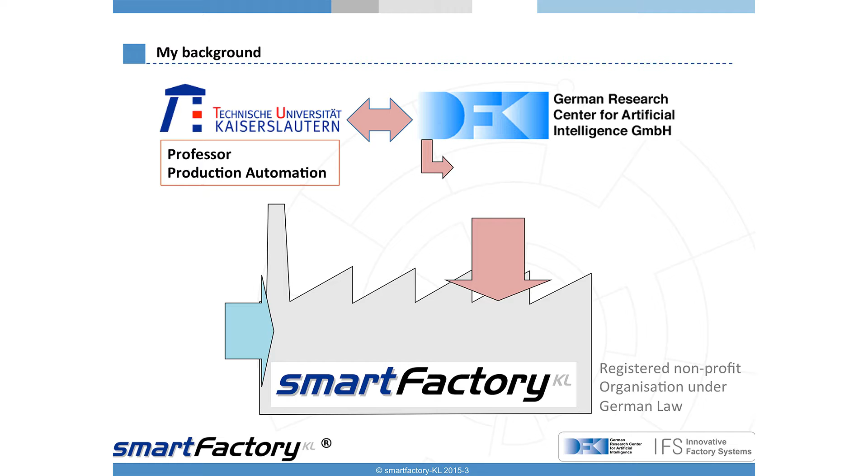I also have a professorship at the University of Kaiserslautern, and by this I have access to the knowledge of the university, the science base, in addition to the research center. And then we have this SmartFactory, which is an association, a legal association under German law, with a lot of companies being partners or members. There is an executive board, and I'm the chairman of this executive board, with co-chairmen from industry to make clear that this is an industry-academia-driven thing.

I think it's quite clear to everyone that we are already living in the internet for many years, so the Internet of People is a fact today. Everyone has these little smartphones, and you can be anywhere in the world, in an airport, wherever you are, switch it on, and you are just connected to the internet with access to everything around the world.

Since about 10, 12, 15 years, we are talking about the Internet of Things, and furthermore we are talking about the Internet of Services. I think especially the Internet of Services is the part of the internet where finally most of the money is made. The people offering things for the Internet of Things put a lot of effort in it, but the money is made by the services running on that - these are the Googles, the Facebooks, and so forth.

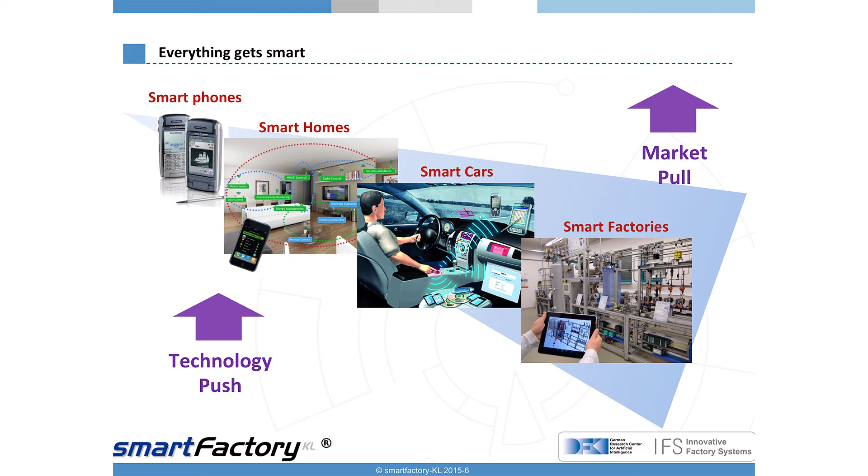Many years ago, there was already the first internet refrigerator, offered by Samsung - that was 2001, 2002, I guess. This internet refrigerator was not a success, at least not in Europe and many other areas of the world. It had the advantage of scanning all the goods going into and out of the refrigerator, so if the milk runs out, it can order milk. But if there's no business model behind it - somebody delivering this milk - the business model will not work. I think this was one of the major reasons the early smart home technologies were not really successful, because the business models were still missing.

So now we talk about the fourth industrial revolution, called by the buzzword Industry 4.0, which is a German buzzword. This is why the German government likes to write it as a German name, not with a Y at the end, but with IE, for example.

The first industrial revolution was around 1800, driven by advantages like the steam power engine, the first trains, and many things around this time. Mostly this revolution took place in Great Britain, which was the most industrialized country at that time.

The second revolution was around 1900 to 1930, perhaps. There were a lot of changes within this time - we had electrical power generation and distribution, but also mass production like the Ford Model T, built on a conveyor belt, bringing prices down and production up.

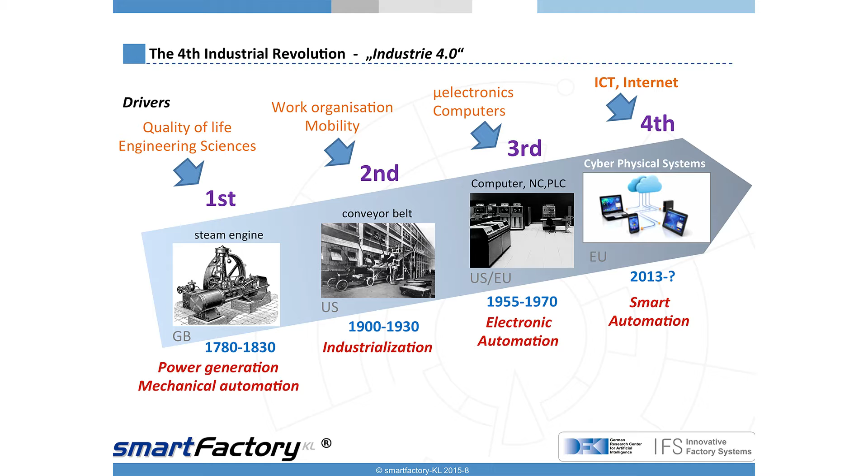And now we are looking into the future, and we assume there will be a fourth industrial revolution, driven by internet technologies, networking all the elements. This is called the smart automation era. But we are just assuming there will be a fourth industrial revolution. Let's wait another 20 years or so and then look back and say, is it really an industrial revolution? I think it is, and it will be, but we have to wait and see what happens there.

If we look back again, the first computers came up around the 50s, and you may call it perhaps the 2.5 revolution at that time. There was already the first computer installed in companies, mostly for things like accounting, for order tracking, and things like this. At that time, there was just one big computer in one company and nothing else.

Then the third industrial revolution, the electronic revolution, brought more and more computers into that. The PC was invented at that time, and the PC and all the other microprocessor-based systems allowed us to make new solutions. This was taking place mostly on the control level, the medium level of the companies. And now we are going down to the sensor and actor level.

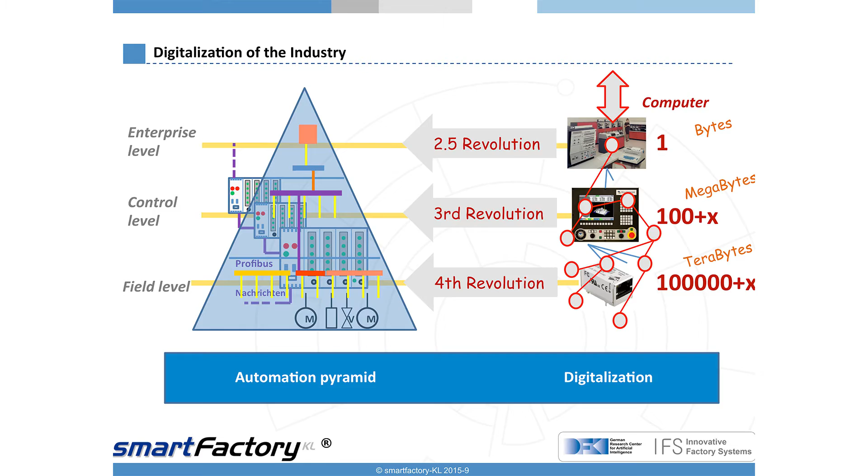So Industry 4.0 means linking all factory objects into a network based on internet technologies, the Internet of Things in the factory. In consequence, all objects like machines, products, but also the humans, the people working there, are smart elements in such a production system.

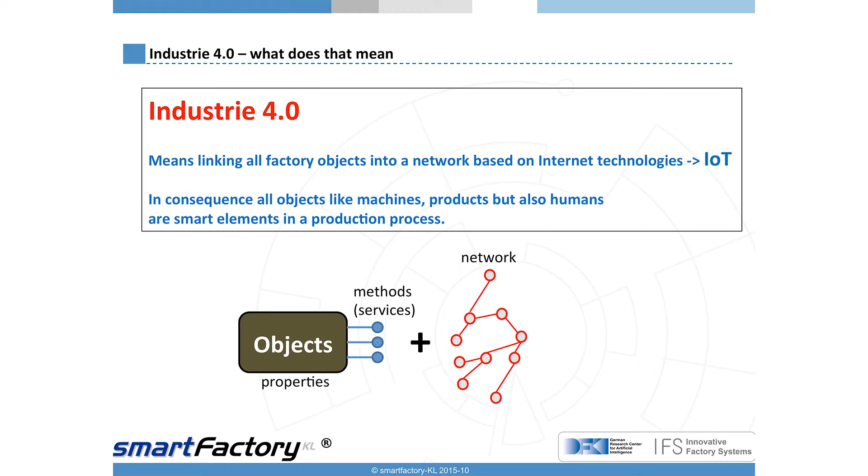So I talk about objects, I don't talk about a sensor or a worker specifically. In a more general sense, we can treat these elements as abstract objects with properties and methods, like in computer engineering. And we have this network, so we can connect these abstract objects via a network, set up networks of these objects, and they can communicate. This is the real progress we have there.

So this will change our factory world in the sense that this very static 3.0 era will be replaced by a very, very dynamic thing, the Industry 4.0 era. We will have more communication of all these objects. The products will also communicate.

They have RFID chips on the products. The people working there will be a part of the network and can communicate. We will have remote services, as we have already in many companies for many years. We will have access to all this data being available via cloud systems, the cloud approach.

For sure, we will extend our systems dynamically, so they are not pre-planned 100%. Just bring a new module in, just plug it in like your printer at home, and it will run and extend your system. We will have the app world also in the factories.

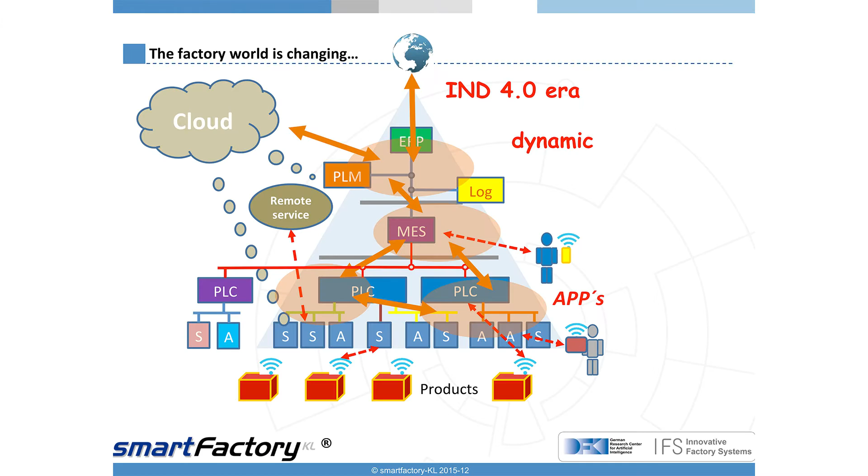The first app stores from companies are available already today, and this will now be extended very, very rapidly so that we can use apps for extending or for bringing in new functions to our technical systems, but also to the people working there. So all this will be connected in a network, and we lose actually this pyramid-style hierarchical system.

We move into a more, let's say, for me, a little bit chaotic network system, which contains domains, or which we can name by domains, because every object can now talk to any other object via the network. So we don't have this hierarchy in that sense anymore, but we have the possibility of having an open network with a lot of objects communicating to each other.

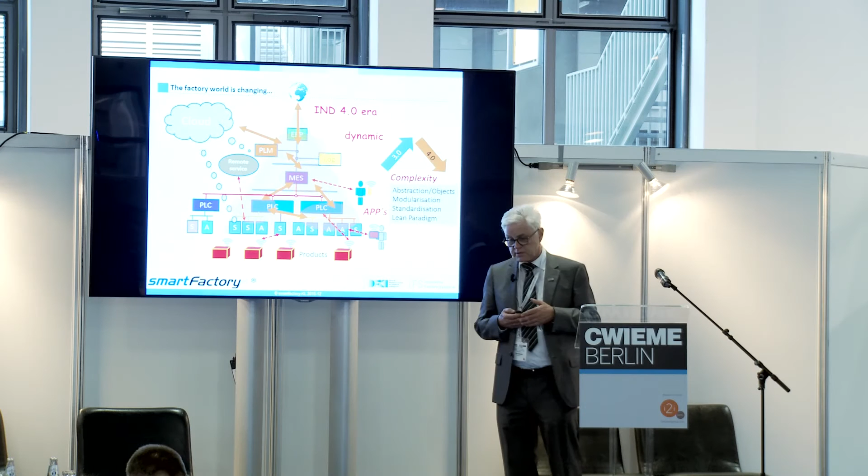This will hopefully bring complexity down because first of all we will have these abstract objects. Don't think about a specific sensor from this or that company, but on the first run just talk about an abstract object, a sensor which has a set of methods and properties, and you can deal with these objects for quite a long time in the engineering phase without having the exact hardware information behind. This decouples software engineering and control system engineering from hardware planning, and we can parallelize these things, making it much faster than it's done today.

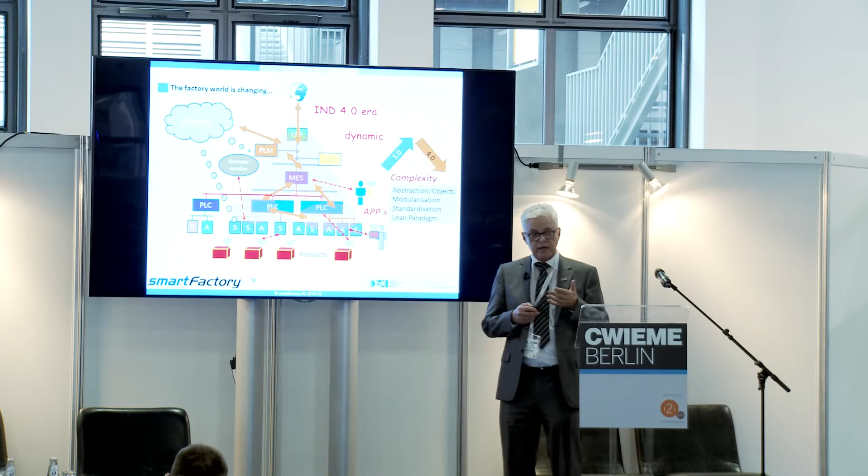We will have a stronger modularization. We will use more standards in this new world, so we have to rely on standards on all levels. And we will also integrate this wonderful lean paradigm, which we have had for more than 20 years already. So always think about the real value of your parts, and keep in mind whether these technologies will really help you or not, and then apply them.

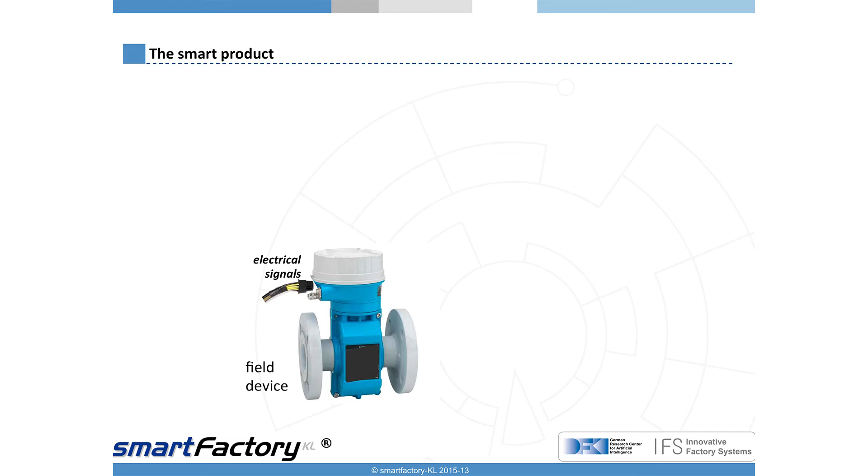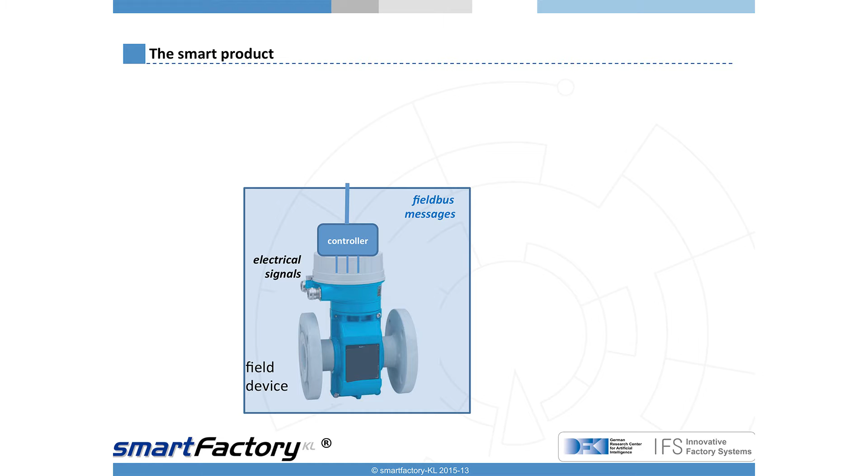Going a little deeper into this topic: first of all, this is a quite traditional sensor as you normally have it today, mostly with some cables coming out of it. This is already 20 years ago, these were 4 to 20 milliamperes, for example. Then over the last 20 years we replaced these analog cables with networks, the first networks. We added a little microcontroller onto that, so finally we had field bus messages, and this sensor was sending field bus messages into a factory-specific network at that time already.

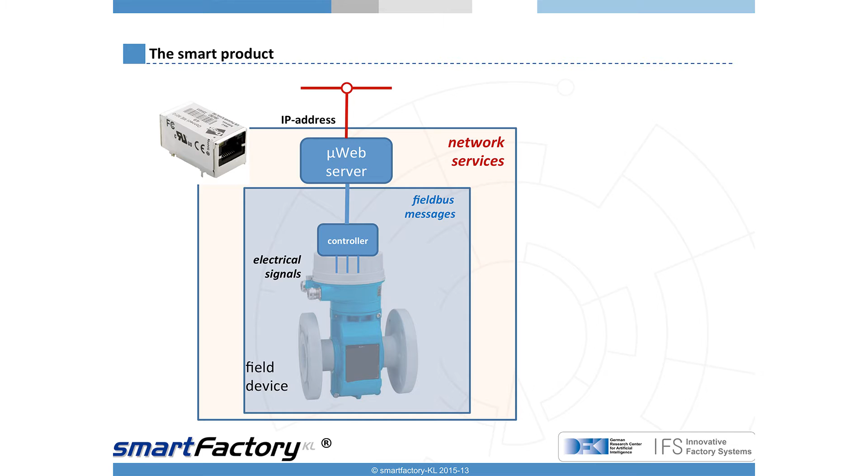And now we are coming to the next step. Now we are adding a micro web server to this sensor, for example, or whatever this may be, to any object. This gives us an IP address and IP technology, so this sensor will finally be part of the internet, and the communication will go a level higher, from messages to services. So we talk about service-oriented architectures on this level, and these elements will offer finally self-identification.

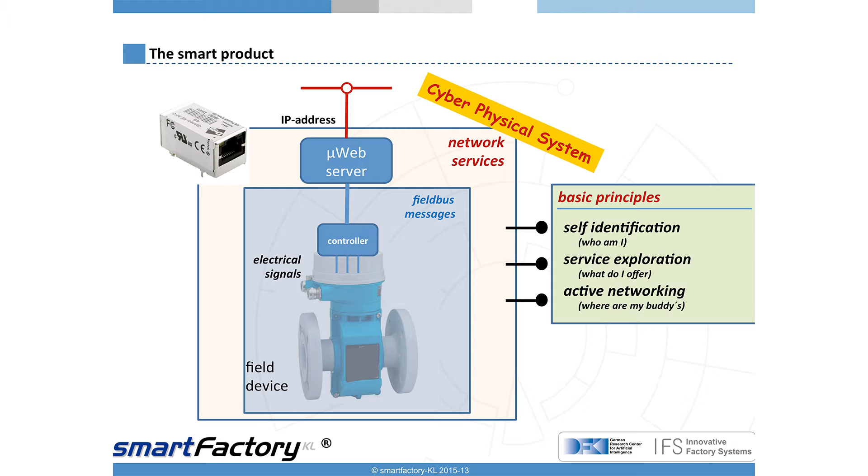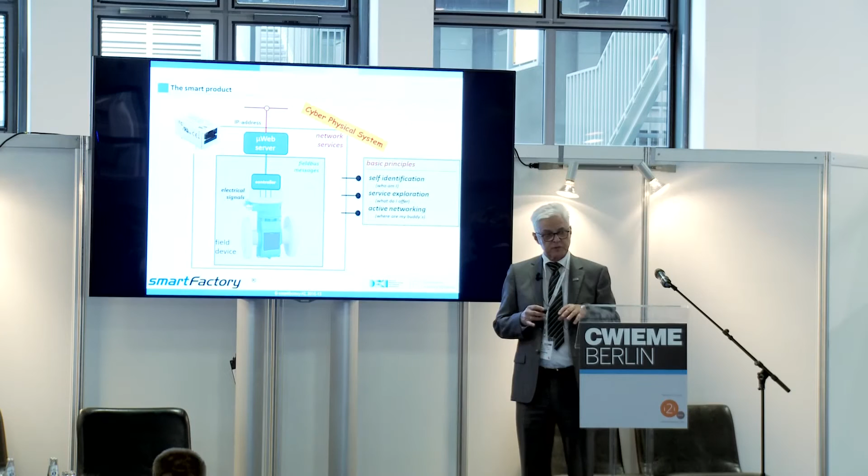First of all, this object may be quite unknown. Just plug it in, and it will tell the system, hey, I'm new, and I'm this and this object, for example, I'm a sensor from this manufacturer, like your printer at home when you plug it in for the first time into your computer. We have service exploration with these objects, so we can ask into the objects what services they offer into the network. And we have active networking capability, so that these objects will automatically configure in the network, and we don't have to care about all this configuration.

This world is available today already. What you see up here, for example, this little block, is a complete computer, a complete PC, the size of 3 pieces of cubic sugar. It costs 30 euros. There's now a new one announced which has just the size of 1 cubic centimeter, a complete PC with a Linux operating system on it. So the technology is available, it's cheap, it's available. If you buy one of these things and plug it or implant it into your sensors for little money, you automatically become part of the internet.

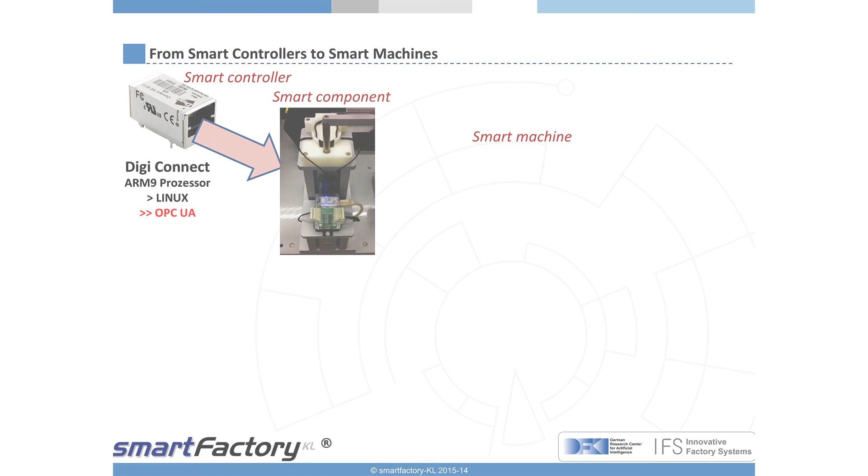So this is what we have done in our lab. This little block here is a bit of I/O and power supply, and the whole thing is now a pneumatic press, for example. Now this complete unit, the pneumatic press, is a cyber-physical system which can be linked into the internet. And actually, by this, I can sit in an airplane over the Atlantic Ocean, and as long as I have the IP address, I can operate this press if I want. If this makes sense is a different question, but I can.

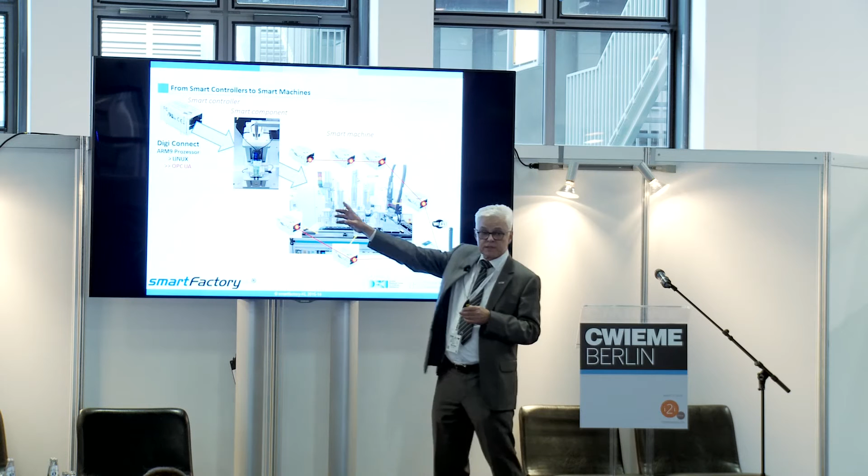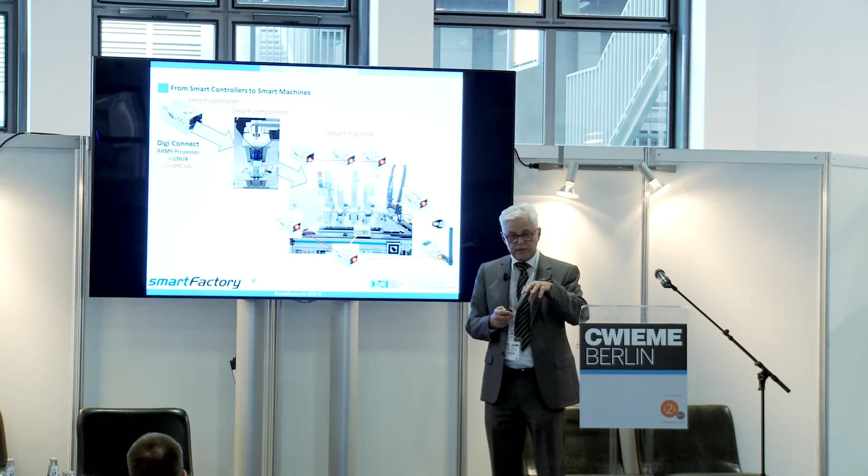So now we have built complete systems out of this. One of these cyber-physical systems, we made a complete assembly system out of it. You see all these little PCs running in the network, and each of these PCs is controlling one of the mechanical components, so the network of all these elements is doing the job. There is no PLC anymore, just a virtualized orchestration of everything, and everything is controlled by the production information which is stored on an RFID chip on the product. So the product can tell the system what to do.

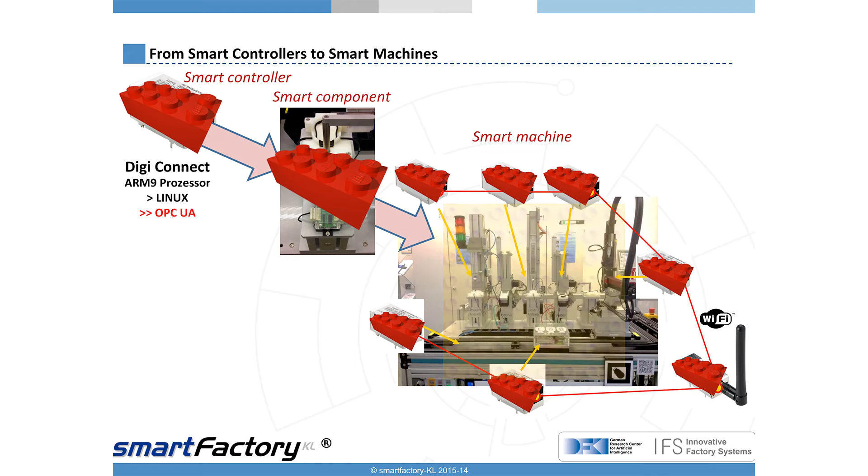We also can use these things wirelessly, so there's also a version available with an antenna on it. It's 6 or 7 euros more, and then you have a Wi-Fi connection if you want.

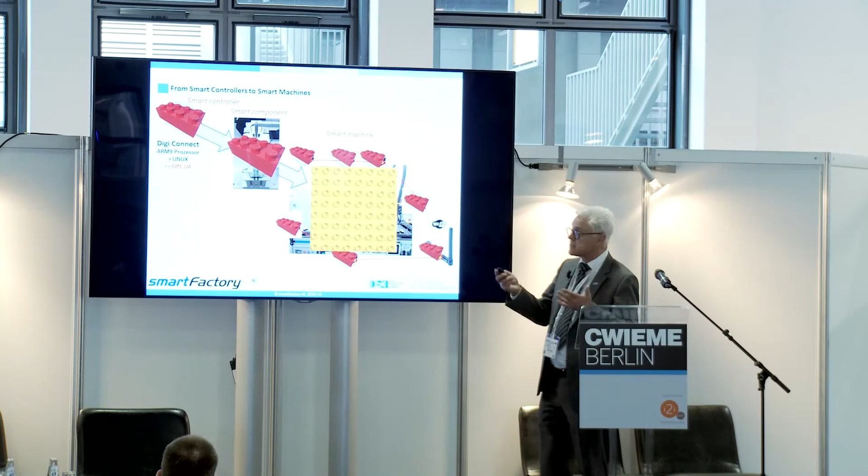Now, if you have these standards, it may be a good comparison to compare it to Lego bricks, because what we have right now are standardized building blocks which we can put together as easy as playing with Lego bricks, and also rearrange the systems if we want, because it's quite easy to link these systems together, and they will also organize by itself. So this is a picture as a comparison.

As I said, this will work only when we have standards. So we made our standards in our group of companies. We start with what we call, as a joke, our USB connector, but it's bigger than a USB connector, nearly the same, because we have one standardized connector, and in this connector there is a power supply, 3 times 400 volts, 24 volts, emergency stop circuit, pressurized air, plus network. The network is also just all in one connector.

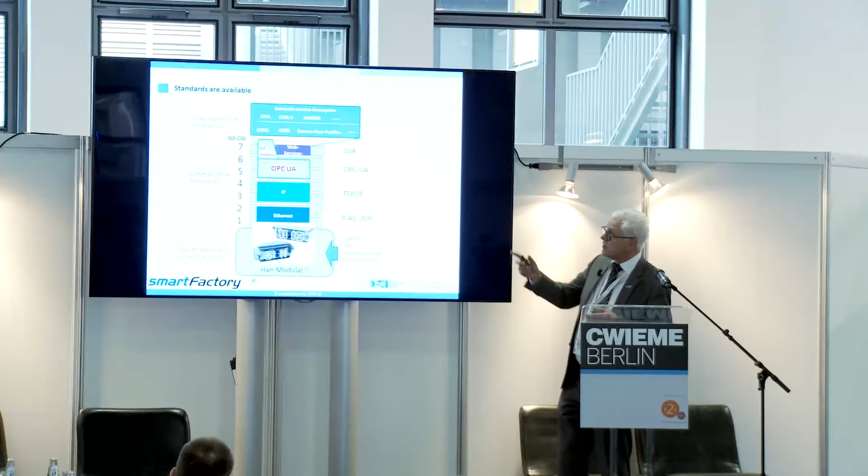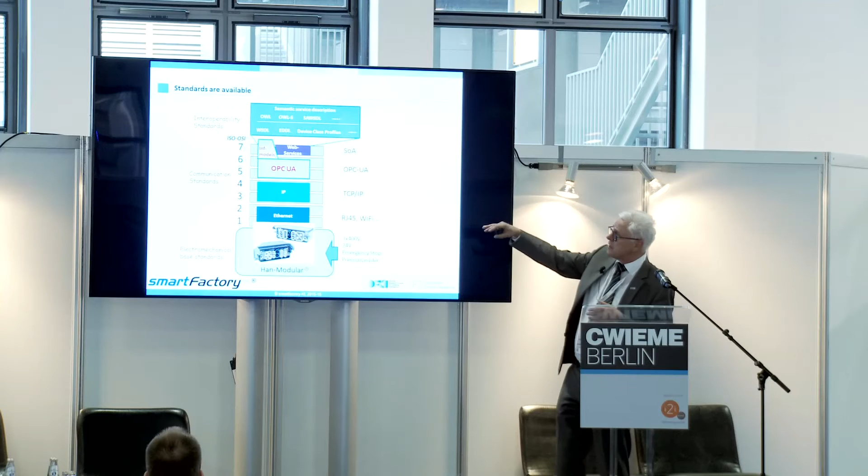Then we have the communication stack above. For communication we have TCP/IP, the standard internet protocols. On the upper levels, we use OPC-UA, I think, as the only worldwide accepted client-server technology for communicating in the factory. And then it becomes quite interesting, because above communication, we will have interoperability.

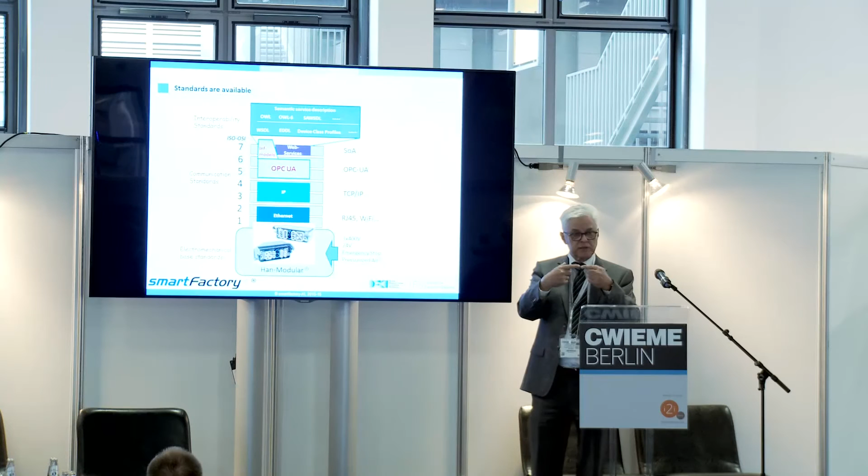So we need the interoperability of these devices. A completely unknown and new robot must be able to communicate for the first time with a machine tool being in the system. So how do we set up a communication between such unknown objects? This is interoperability, and this is the most crucial part of the job we have.

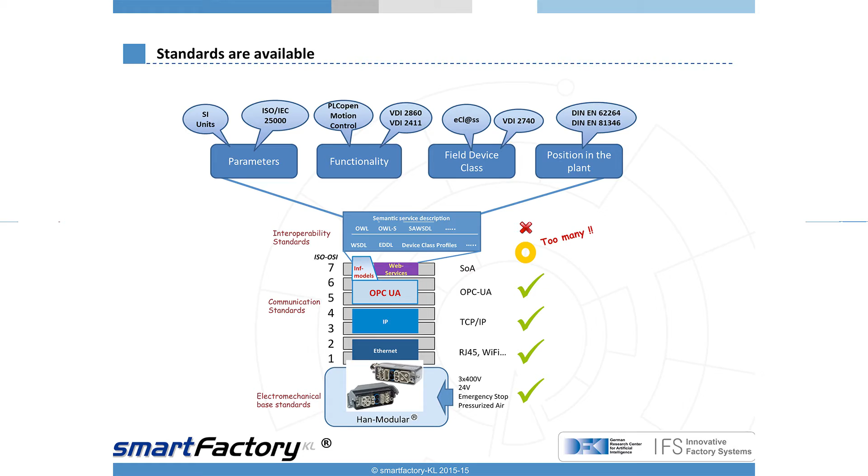There are already a lot of standards available, but we still have to work on some of these levels, especially on the upper levels of interoperability. There's still a lot of work to be done. We demonstrated at last month's Hanover Fair that this works already in our system, but we know exactly that it's not the right time to bring it into industry. So on these upper levels, we still have to do some jobs.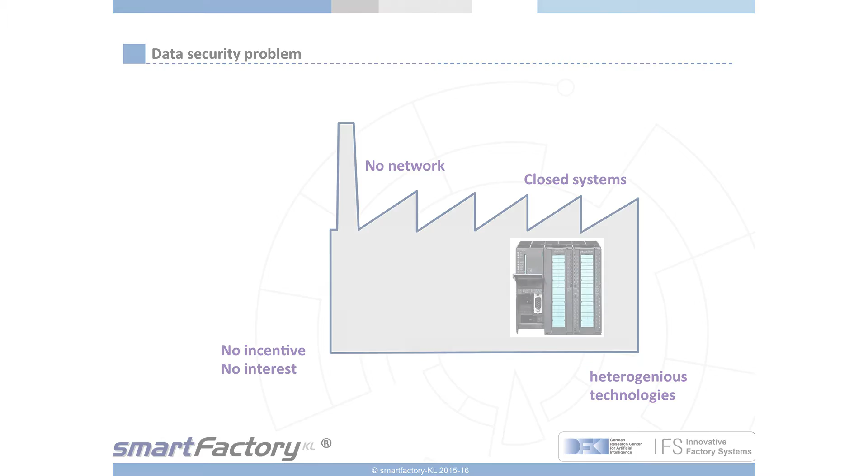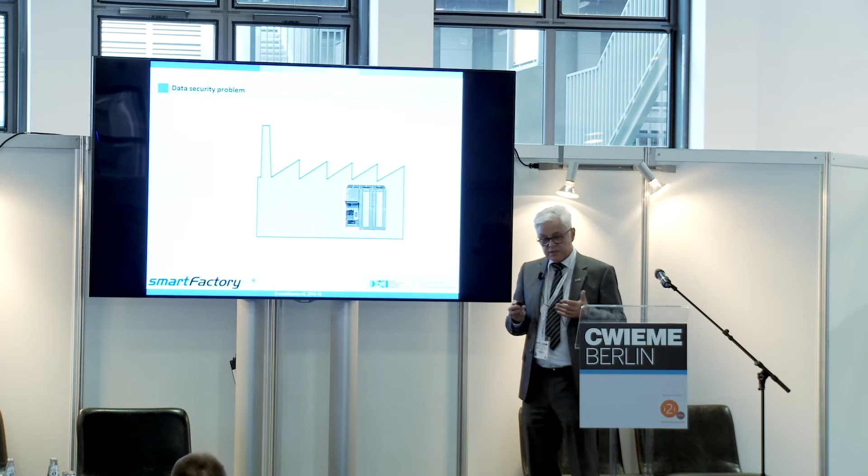Unfortunately, the internet has not only advantages. The internet is cheap, it's proven, it's mature, wonderful, but also anyone can access the internet, and anyone can do some harm to these systems, as we have just learned from this French event with hacking the TV5 station, for example. So the old world is really changing in the sense that we will have now these networks.

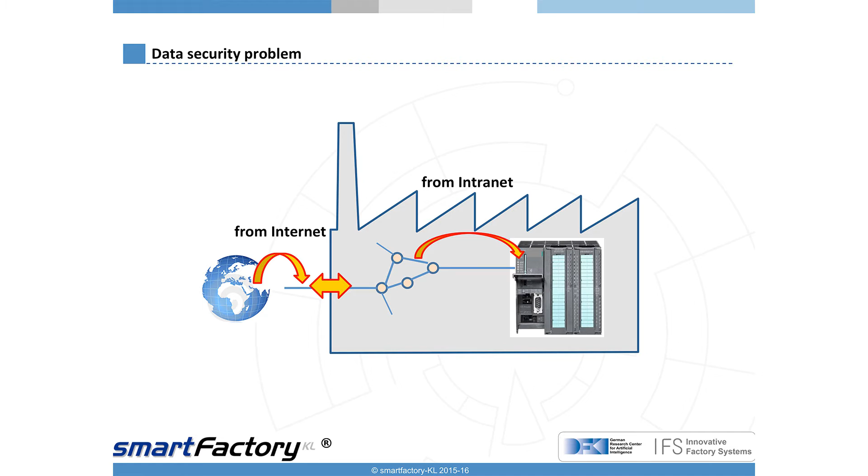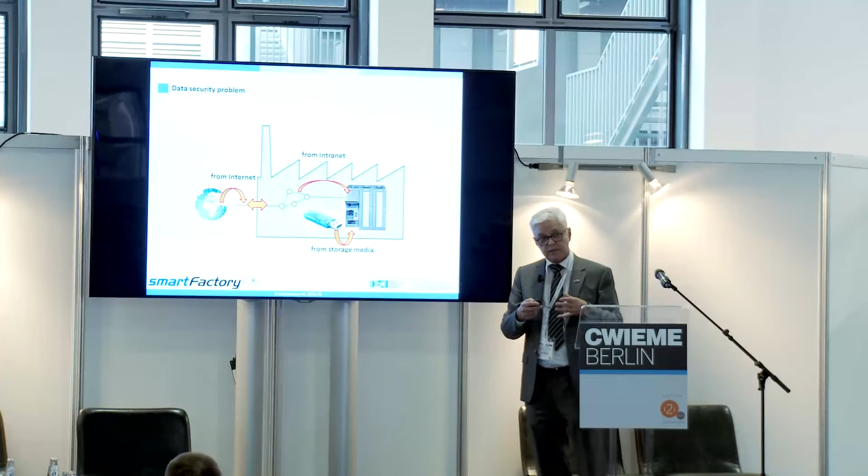We will have more and more access to the outer world, by the internet, for example. But unfortunately, this is not the biggest danger we have; the biggest danger is mostly coming from inside the companies, because we have USB ports, for example, but we also have people doing something which is not allowed. So most of the problems we encounter today in the companies are not coming from the outside, but about 80% are coming from the inside of the company. So this is very important.

So we have open standards, but we need the awareness that these open standards are comparable to open doors. Most of these companies have wonderful security guards outside, wonderful doors—when you go in, you sometimes have to hand over your smartphone. But in terms of data security, they have open doors. Anyone can access this; they don't know it. That's the good message and the bad message as well.

So we need technologies to solve this problem, but we also need very strict rules about what is allowed and what is not allowed, for example. Just to give you a small example, about 2 years ago, I think, there was a wonderful test in the US. There was a US-based company from the aerospace and defense sector, a highly secured institution, actually, with big fences around. And then there was a newspaper, a magazine, that made a little test.

They took 20 or 30 USB sticks in the form of a Mickey Mouse, and during the night, they threw them over the fence, hoping that someone would pick up these little USB sticks and put it into the computer, which was completely not allowed. So what happened, they waited just for the messages from all these USB sticks. There was a little virus on it.

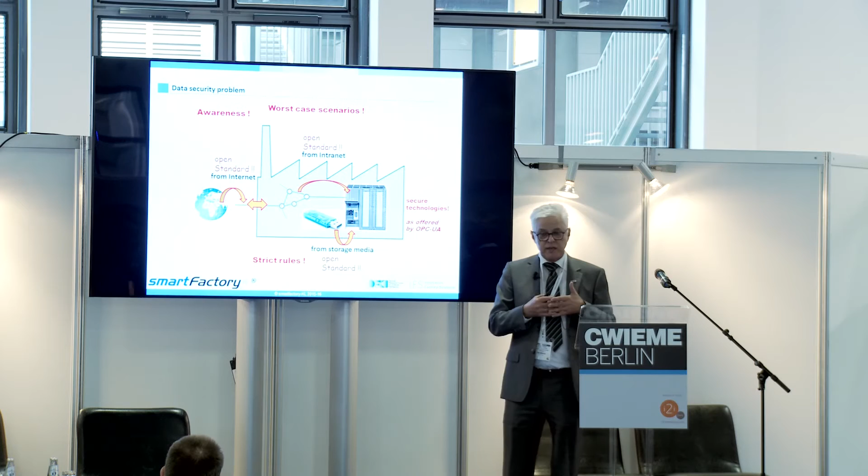There was a game on it. First of all, the user would see a game. But there was also a virus reporting to this magazine which stick was activated. I think they threw over 30 sticks, and about 3 were activated. And it was strictly not allowed to do this. So this shows that the major problems come from the inside, so you have to make very strict rules about what is allowed on the inside as well.

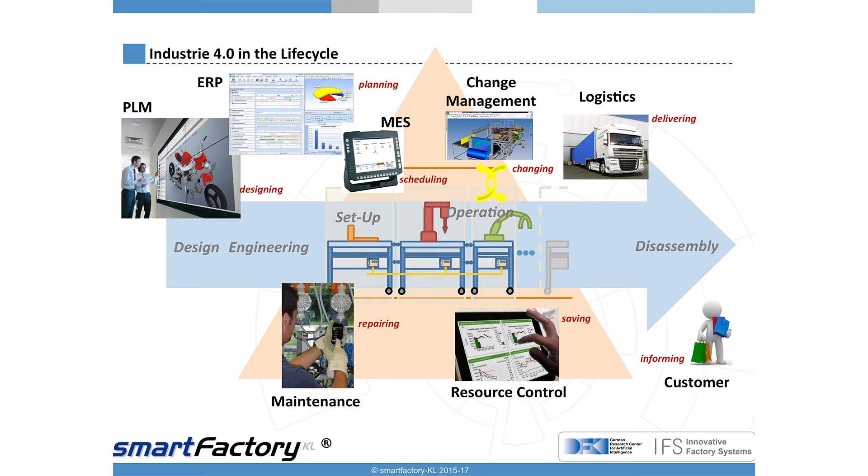Another bad news is that Industry 4.0 is not a singular technology just affecting one machine, but it's really affecting the complete life cycle. We will install more and more an information backbone in our companies, which mostly already exists in the PLM world of engineering and design. Sometimes we also have some sort of information backbone for logistics and customer integration. But in the middle of running the systems, we have many systems around. We will move toward reducing to just one system, one information backbone, and I think this will affect the whole company operation as we go into this new era.

So let's come to the practical application. This was now a little bit more theory.

In practice, we decided already 10 years ago to set up such a vision in reality in our lab. We founded our SmartFactory lab in Kaiserslautern, located here in this building. There we have really running factory systems, not just theory or software, but real machines running. We are the worldwide biggest and well-known independent research and demonstration center for these technologies, and the name Industry 4.0 actually came out of our lab in Germany.

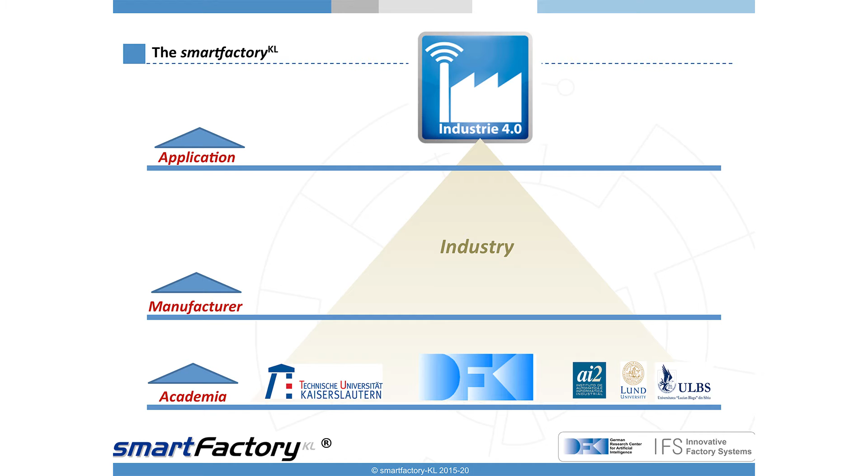As I said, we are member-driven. We are an association with members, comparable to a football club actually. There are academic members, also European ones, from Spain, from Sweden, from Romania.

Then we have the more application-oriented side of the business. These companies are mostly not producing any elements for this new world, but they want to use it, to have the experiences out of this world. But again, the manufacturers also need the users, because the users have to tell what they are willing to do and what they are willing to change, and for which cost, for example.

Here you can see it's a completely modular system, consisting of independent modules. Each module was built by a different manufacturer, so now these modules can be put together. They are on little wheels down there, so you can just switch off one module during running operation. The rest will still run on.

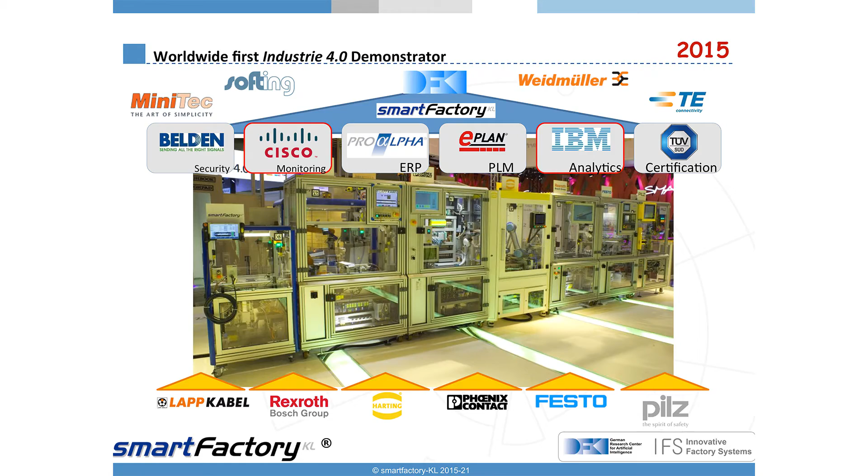We bring one module out, bring a new one in, switch it on, and immediately it runs again. So it's a completely flexible system. We can rearrange the order of these modules as we like, also under running conditions. We don't have to shut down the complete system—we can just switch off singular modules, rearrange the system, and it will still run.

On the upper side, these are our so-called infrastructure partners. They don't supply a module, but they supply knowledge or technologies for the infrastructure.

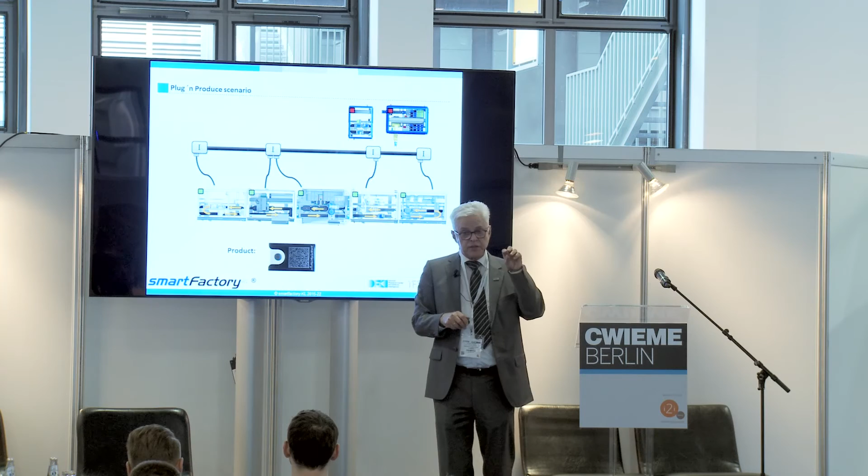So what will this mean? For example, this is our product which we produce. Here you can see this little chip—this is the RFID chip. The first operation is always to fill the complete production information into this chip. This is the starting point of everything, and now this product is really controlling all these modules.

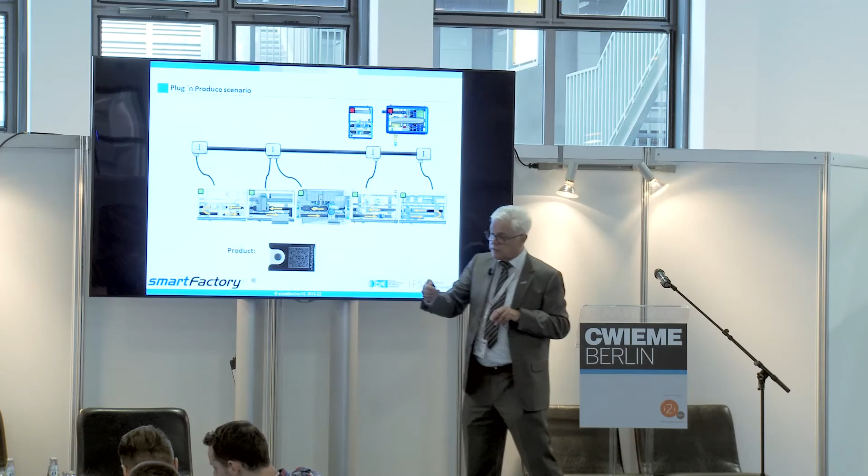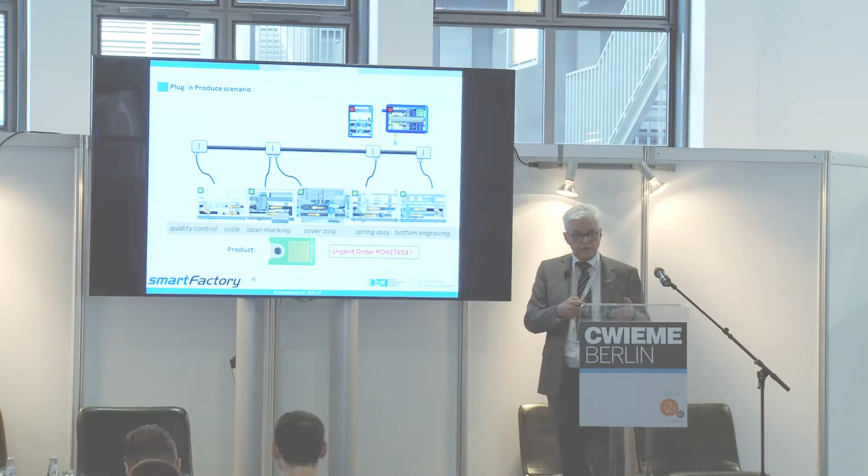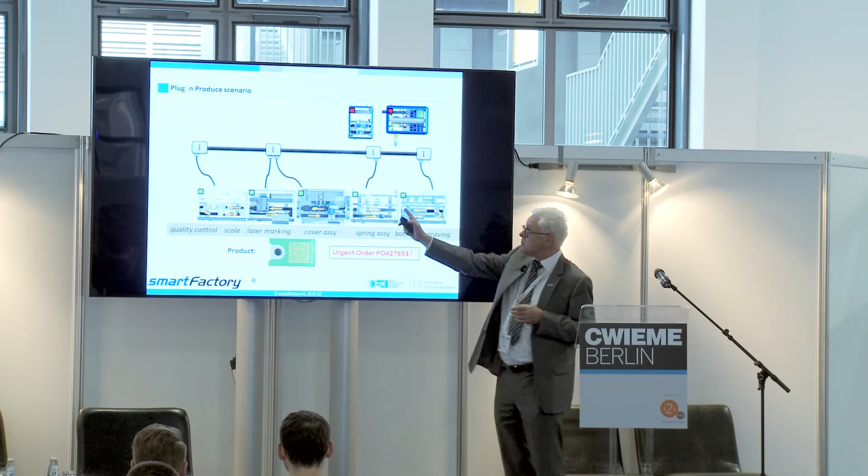Let's say there's a customer coming with an urgent order, and he says, 'I want a different color, and I also want a little gift put inside, a USB card or a little tool or whatever else.' So now we need new modules, and these new modules are waiting. The complete system is running, as you can see here from the green dots.

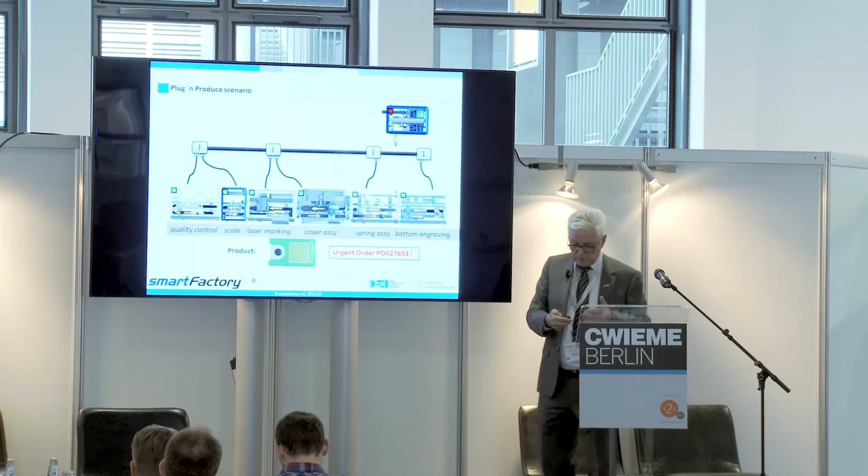Now we need a scale. This is still running, this is switched off. Now the scale is being put into operation in between—just plug it in with our USB connector, and seconds later it's running.

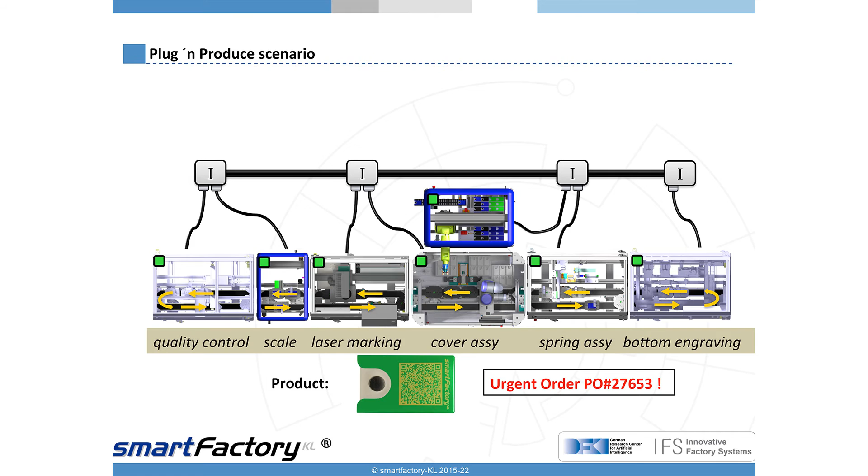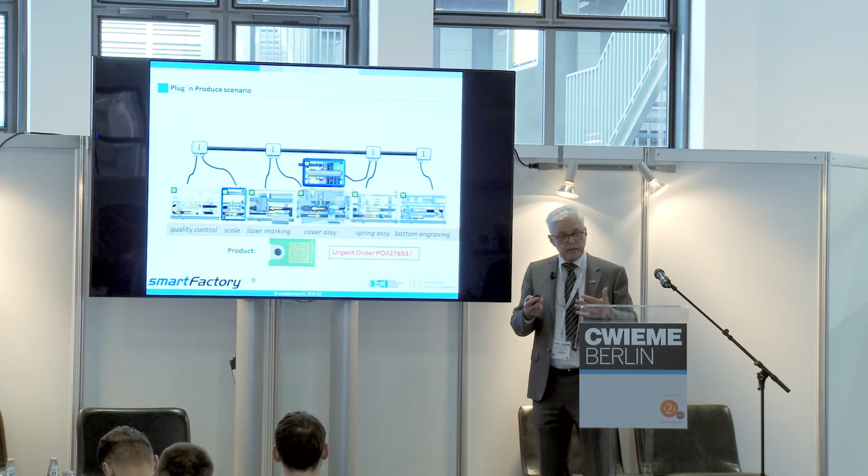And we decide we still have to use a robot module. Just bring the robot module to it, attach it, plug it in, switch it on, and the system is running. This is what we achieved today—the current status where we can make plug and play on this level with mechanical elements.

So let's come to the conclusion.

Which parts of industry may be most interested to begin with? First of all, I think all the industry which already have modularity in hardware, for example the packaging industry. They already have these modules, so it would be quite easy for them to apply these network-based control technologies into their modules, and then they can go to a plug-and-play system quite quickly. This is also true for parts assembly, like electronic assembly of electronic goods.

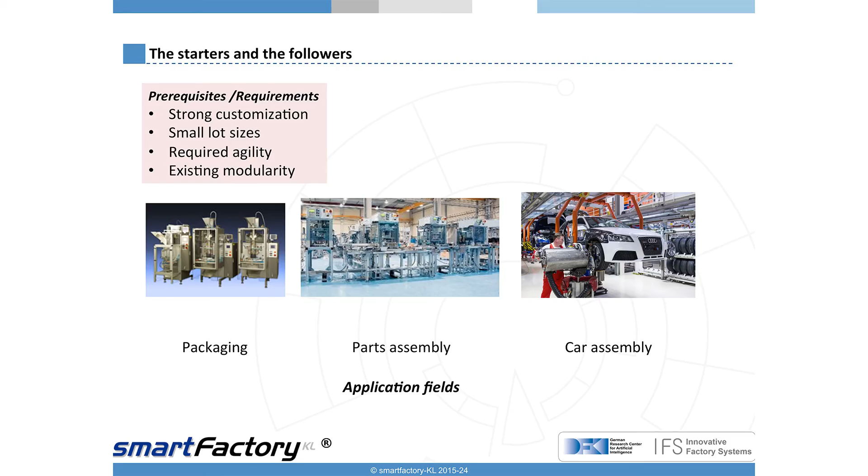I think later will be car assembly. Cars are much bigger and more complex, and it's not so modular in car assembly, but I think they will also start, not with complete car assembly, but with little parts assembly of parts being supplied to the final assembly line. So we need strong customization, small lot sizes, required agility, and existing modularity. If this comes together, a company would be a wonderful partner to start with these technologies and move into a new era of production.

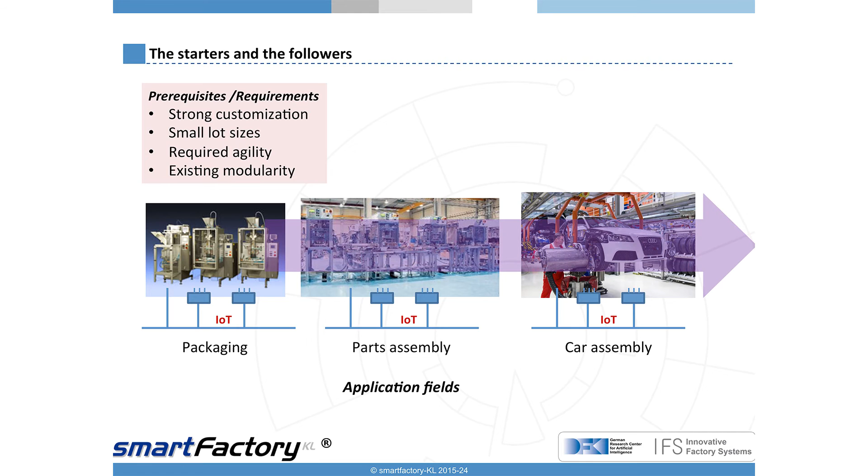And for sure, this is based on the Internet of Things. Nevertheless, it's still a rocky road until we really reach the Industry 4.0 reality. So today we are actually in research. We have industrial demonstrators - in Hanover there was not only the demonstrator from us, but also a lot of other demonstrators from other companies. We will have first industrial systems, real running productive systems, in about 2 years perhaps. On the long run, broad industrial application will take another 10 years perhaps. So it's not a very short revolution within a couple of days, but a really evolutionary development into a new world.

We still need to work on worldwide standards - remember the picture of these Lego bricks. You must achieve something like a Lego brick which is standardized all over the world, which is quite complicated because the world has to agree on that. There are now standardization groups around the world active in this field, but we are still in the beginning with that. We need safety and security solutions, as I said already. When the first company is shut down by a competitor from somewhere in the world due to these network problems, they will immediately lay off these new technologies.

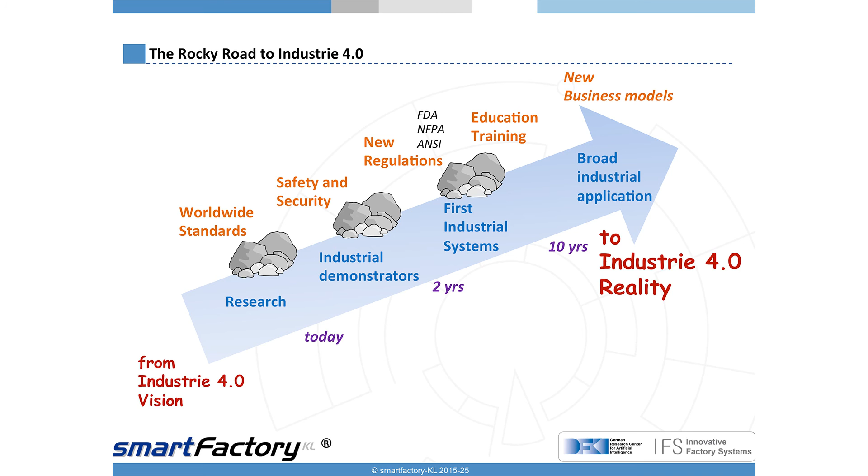And at the end, we need new business models. Coming back to the Lego brick again - it's just a piece of plastic, that's it. The company Lego doesn't earn money by selling plastic blocks for cents. They earn money because they have a system behind it, and a lot of other things where they make the money. So this is also what will be changing in this world - the component manufacturers especially have to think about new business models, because they will become interchangeable, and with interchangeability they will lose perhaps their business. Now they have to look for new business models offering systems approaches or whatever else.

A short look into the world before I finish. It started in Germany with this idea about 4 years ago. In the meantime, the German government put some money into that to further develop all these things. Austria and Switzerland are following us in Europe, and now more and more countries from Europe will also follow. We have the US with the Industrial Internet Consortium and also the SMLC, comparable a bit to our Smart Factory Association. But also here in the Far East in Asia there are big activities starting right now - Japan is now coming with a lot of activities, Korea is doing a lot, and China put an awful lot of money into this new technology world. So we will see what will be driven forward by the Chinese, also on the basis of the funding money available.